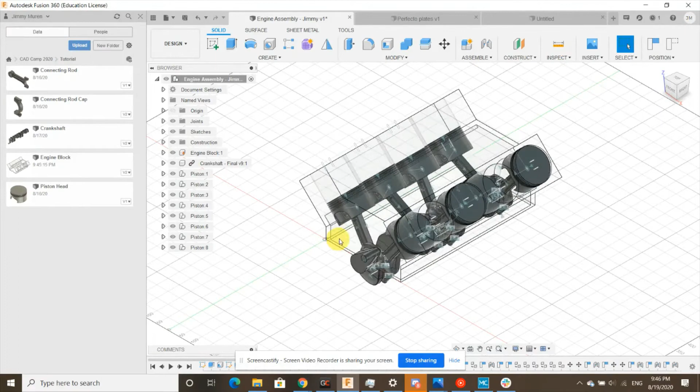Today we're going to be putting all these pieces together into an engine assembly, like you see over here. Once we put them all together, they will actually be jointed in a way that they move just like a V8 engine. Pretty cool, huh? So without further ado, let's get right into it.

The first thing we're going to want to do is open up our engine block file. This is where we're going to be creating our assembly. Double click that and open it up.

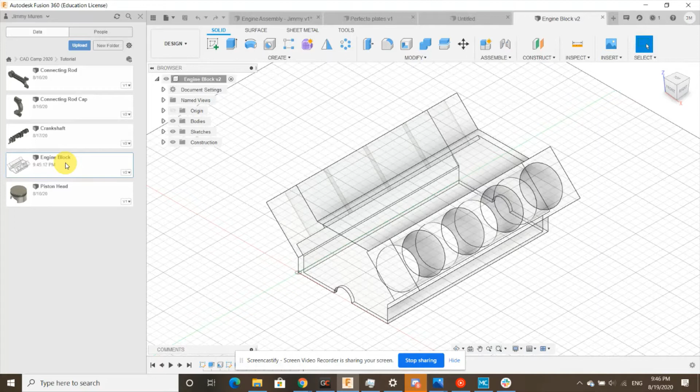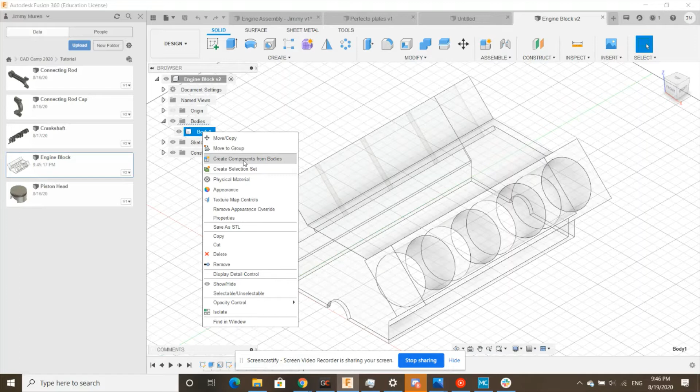Now, the first thing we're going to want to do in our engine block file is actually turn our engine body into a component. How we're going to do that is we're going to find our bodies folder in the feature tree, hit the drop down, right click the body which is linked with this engine right here, and we're going to choose create components from bodies. We hit that, and you see a new component pops up. So a component is symbolized by a cube, and these bodies, which you saw before, were symbolized by a cylinder. So now this engine is a component.

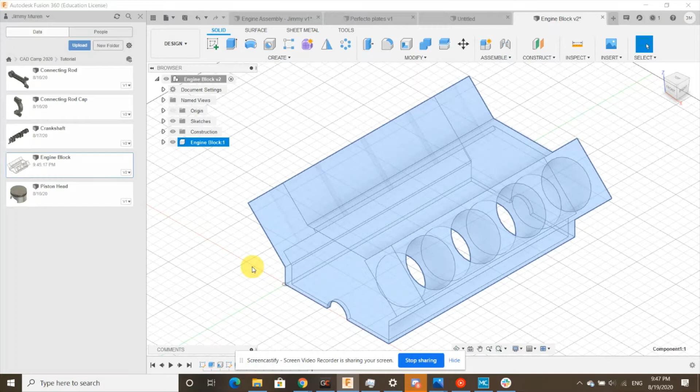You can double click that to change the name, and we're just going to call this engine block. Okay, so the first step is done.

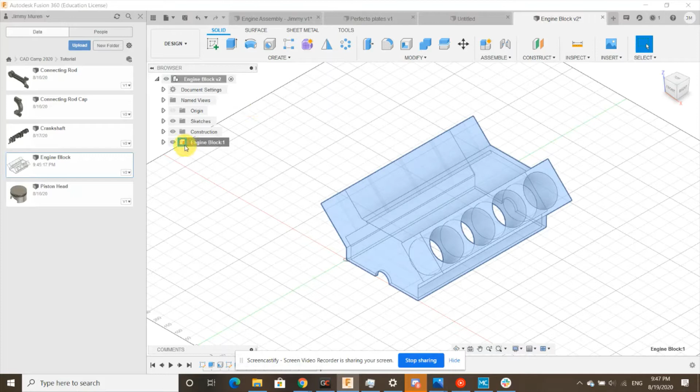Now, another thing we want to do is make sure that this engine isn't moving around while all the other parts inside are moving around, because right now we can drag it all around however much we want, which isn't good, since if the engine can move and all these other parts can move, it's just going to create a mess. So we're going to right-click engine block, and at the top choose Ground. Now you see a little pin appear next to our engine block component icon. That means it's grounded, and if we try to drag it around, you'll find that you cannot drag it around anymore, which is exactly what we want.

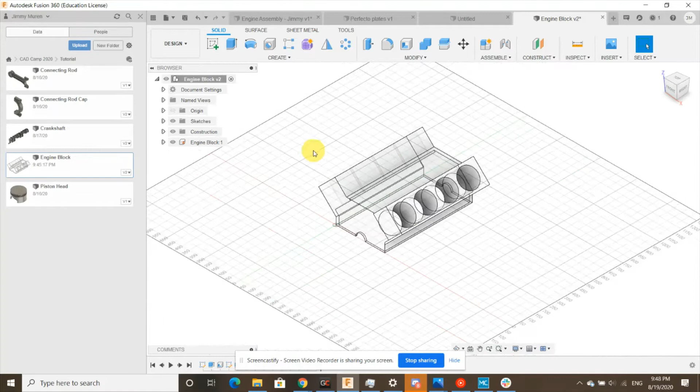Okay, so once we have our engine block as a component, now we're going to start inserting our other components into this assembly. You can see up here this icon turned into 3 blocks, which is the icon for an assembly. Once again, bodies are a cylinder, components are a block, and these 3 blocks is an assembly.

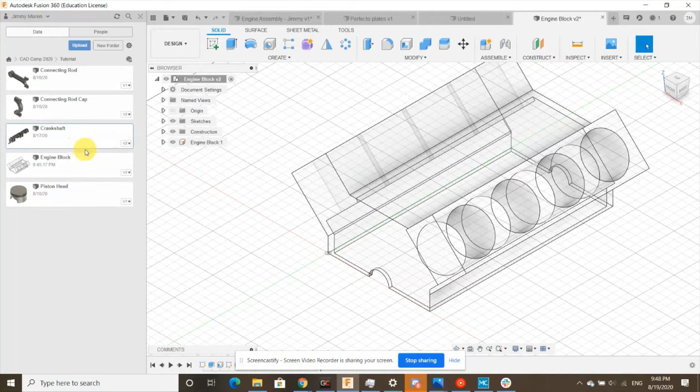So we're going to insert our crankshaft by right-clicking it and choosing Insert into Current Design. And boom, there we go. Our crankshaft is in the design as a component, which is what we want. The reason why we want this as a component is the new feature we're learning today, called joint, only works between 2 components, so we want to make sure everything in here is a component.

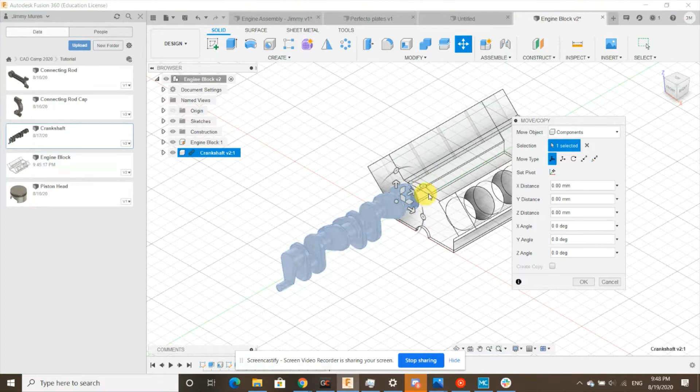Now you see there's an option to move the crankshaft around. We're not going to have to use that, because our joint feature will actually help us move it to the proper position and establish motion between the crankshaft and the engine block. So joint is really, really useful.

So now that we have our crankshaft in here, one thing we'll notice is that it has this little link. Now what does this link mean? This chain link just means that this is linked to another part in the project, which is crankshaft.

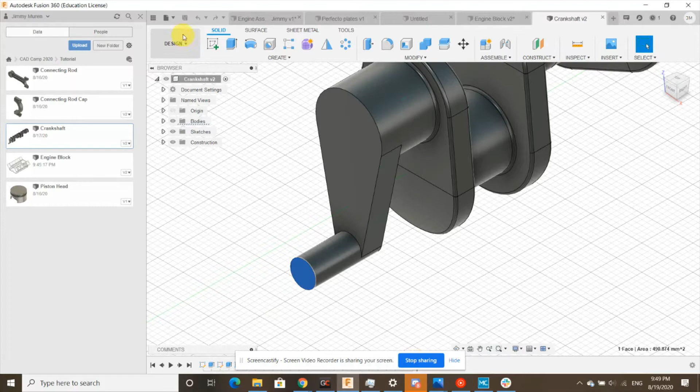So say we go open crankshaft and make a small edit, like making this handle a little bit longer. If we go to sketch, create a circle here, and extrude this maybe another 10 millimeters, we see that the handle is a little bit longer. If we save that with Control S...

We'll see that when we come back to our assembly, there's a warning sign next to that link symbol on our crankshaft. This just means that our crankshaft is now out of date because we edited it in the original file.

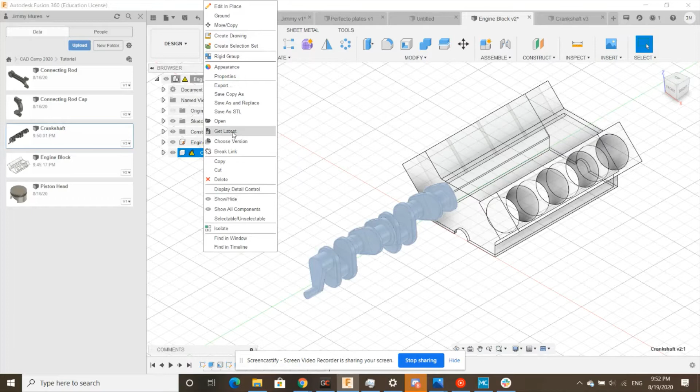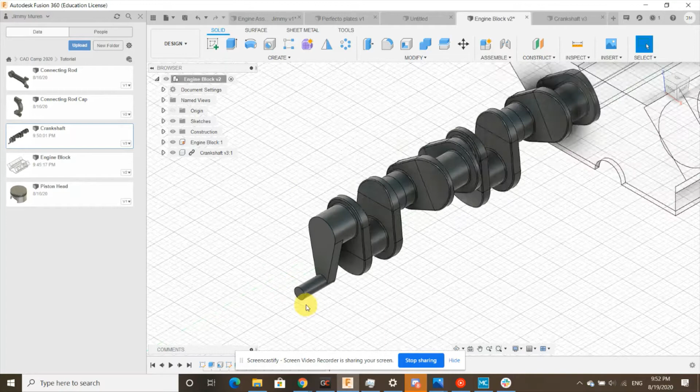If we right-click this, we'll see there is a Get Latest option. So when we hit Get Latest, see that this handle got extended out a little bit. If I undo what I just did, you'll see the shorter, older version with the error. If I redo it, it is the updated, longer version. Okay, so that's what this link means: any edits you make in the original file will update in the assembly.

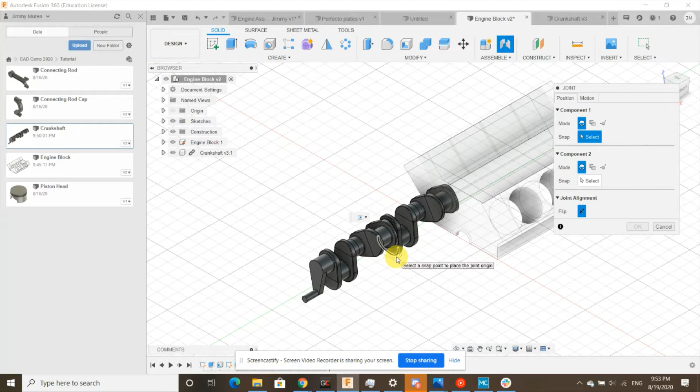Okay, so now that we have that taken care of, we're going to go ahead and start using our joints. You'll find the joint feature up in the top in your Assemble tab. Once you click joint, you're going to first click this face over here on the back of your crankshaft, and then click the very back of our engine block.

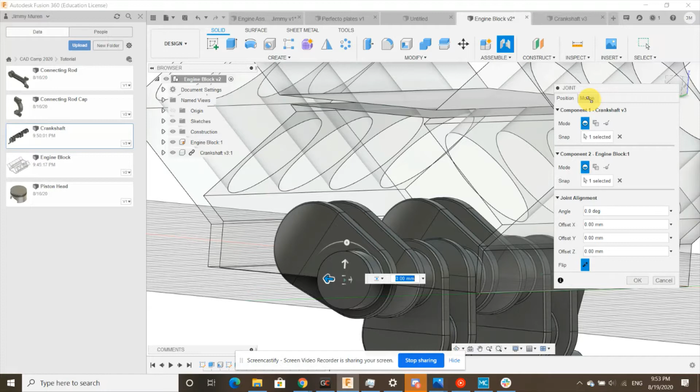When we hit that, we can see that our crankshaft got moved to the exact position that we wanted it, except it's doing a weird motion sliding in and out, which is not exactly what we want. So we're going to go to our motion tab next to position, and we can see right now it's a slider. That's why the crankshaft was sliding in and out. We want that to be revolute, which means the crankshaft is just rotating. Now you can see it does a little demo of the motion, and that's exactly what we want. So we're going to hit OK.

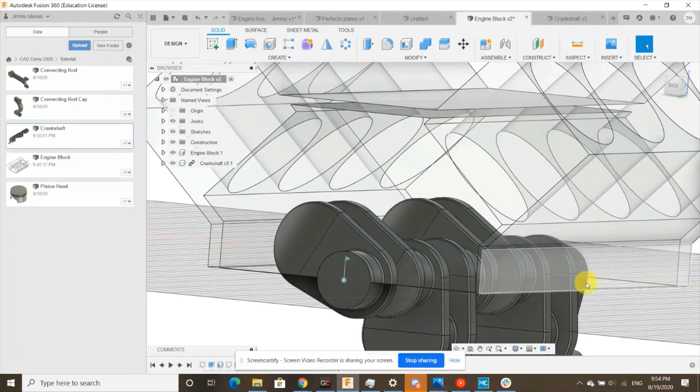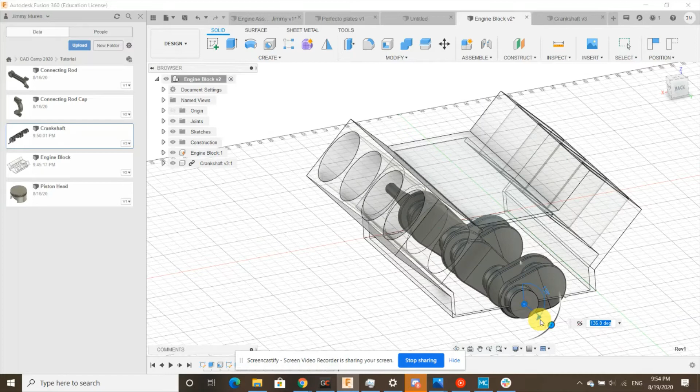Now, once we have revolute established, we can actually grab the crankshaft handle. And when we spin our mouse, we can see that the crankshaft spins as well. And there we go, our first joint is completed. Now, another way you can go about spinning this is just clicking this blue flag in the back. When you double click it, a little spinner will pop up, and you can hold this and rotate that way as well. Either way works.

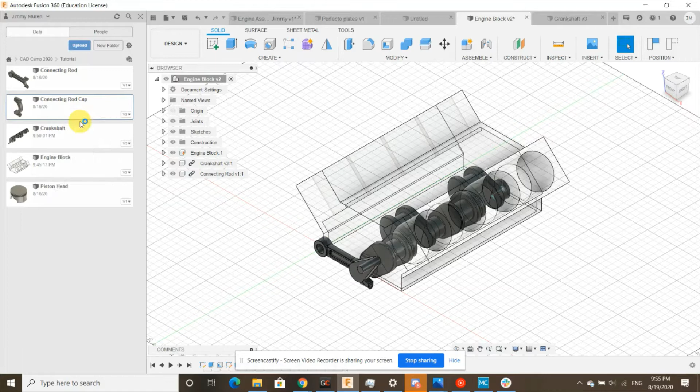So now that we have our crankshaft in, it is time to add our pistons. How we're going to do this is first, we're going to have to put our piston together, so we're going to have to insert the different components. So connecting rod first, once again right click, insert into current design, and then connecting rod cap. That connecting rod cap, right click, insert into current design. And we're just going to drag that out so that it's a little bit in front of our connecting rod, and then hit OK. Now what we're going to do is put another joint between the cap and the rod.

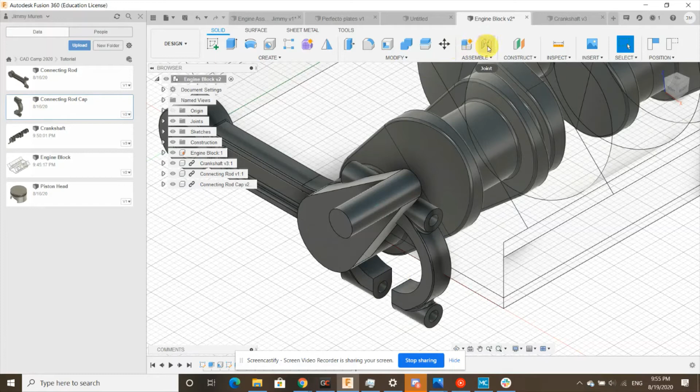We're going to hit joint, make sure we capture the position. So we're going to click this hole on the connecting rod, and then the corresponding hole right here of the connecting rod cap. You can see that joins them together. Right now it does a little preview of the connecting rod and connecting rod cap rotating, and that's because we have revolute selected. But we don't want them to rotate, we want this to stay rigid in the same place. So we're actually going to click rigid for our motion type.

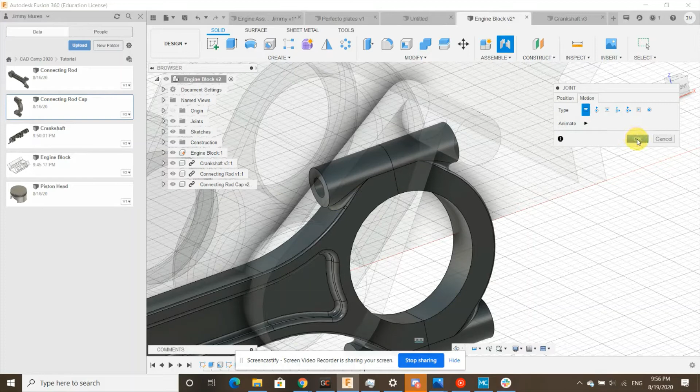Kind of gives it a little shake. That just shows that this isn't going anywhere. This is stuck together now with this joint, as I can demonstrate when I click OK. If I take it and drag it around, you can see nothing I do will take these two apart. So these two pieces are permanently put together, which is what we want.

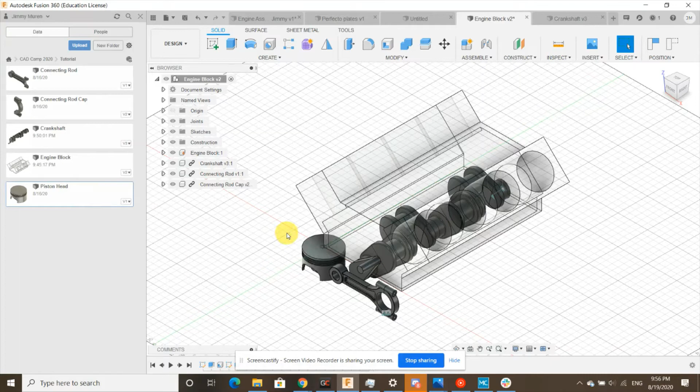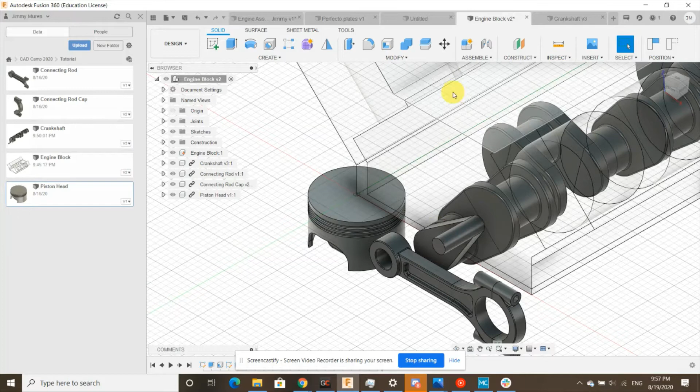Next, we're going to insert our piston head. So once again, right click, insert into current design. And we're just going to leave it right there because the piston head is actually going to connect to this side of our connecting rod right here. So all you have to do is put it somewhere near where you want to connect it. It doesn't have to be perfect because as you saw with our other joints, it moves it to the correct position automatically. So once again, we're going to hit joint, capture position. We're going to choose this hole on our connecting rod, and then choose that corresponding hole on our piston head, so right in here.

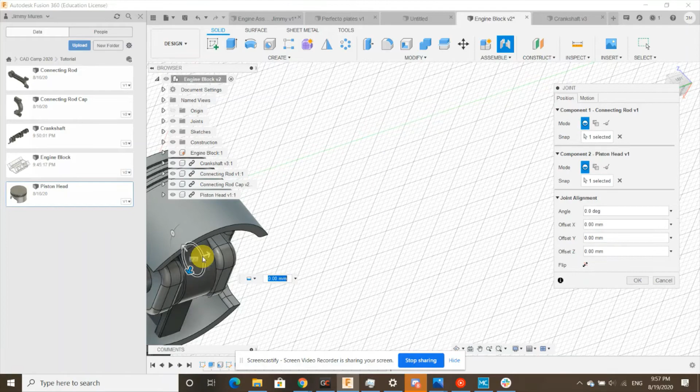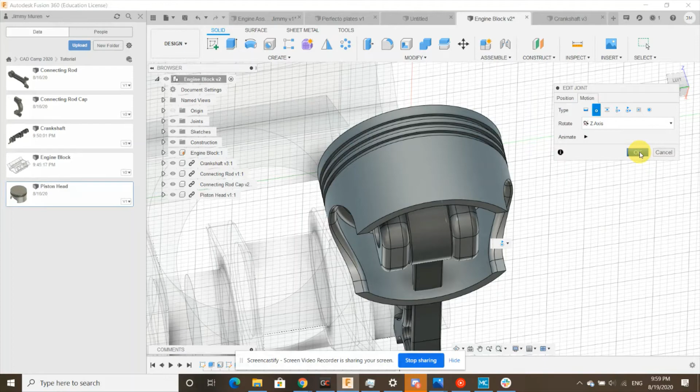You can see once we click that, right now we had our rigid motion selected. But we actually want this piston to be able to rotate, so we're going to go into our motion and select revolute. Once we select that, it gives us a little preview that the piston head and the connecting rod now rotate with each other. And then we're just going to hit OK. Going back to our home view, you can see all these pieces are connected together now as a piston.

But if you remember from our engine assembly, we're going to need 8 of these, right? It's going to be a lot of copying and pasting, and a lot of work if we have to do this 8 more times. So what we're going to do is we're actually going to save all 3 of these and their joints into one new component called piston.

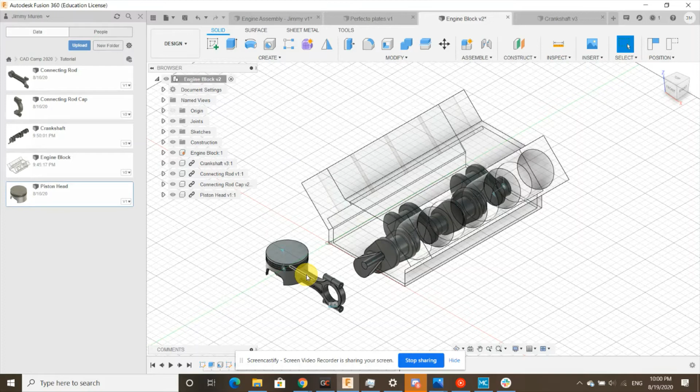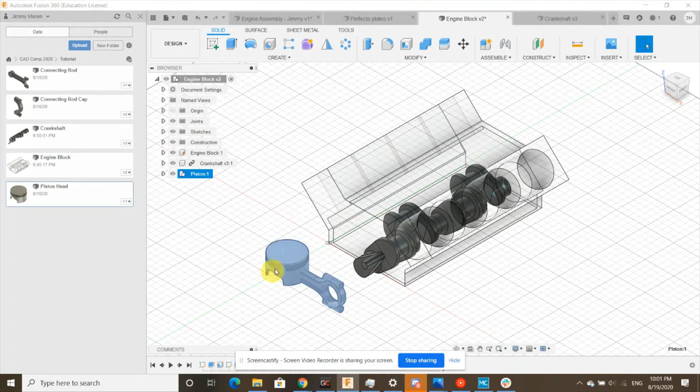How we do that is we're going to go next to our joint and select new component. And make sure activate is unchecked, I believe it's checked by default. And we're just going to name this component piston and hit OK. Now you can see piston got created in our feature tree over here. And all we're going to do is drag each part, capture position, drag each part of our piston into our piston assembly. And you can see it's an assembly by those 3 blocks there. And once we select our piston assembly, you can see that it highlights every single part on there, which is exactly what we want.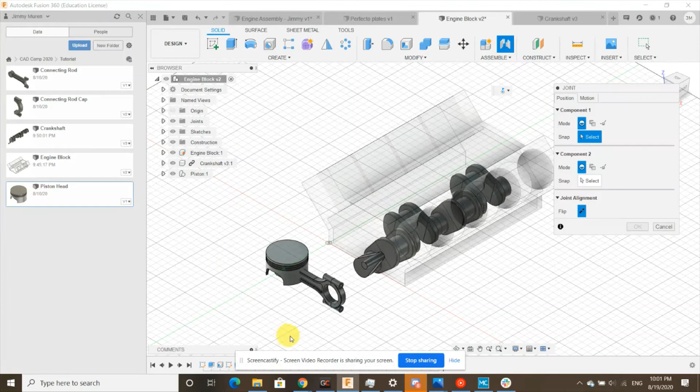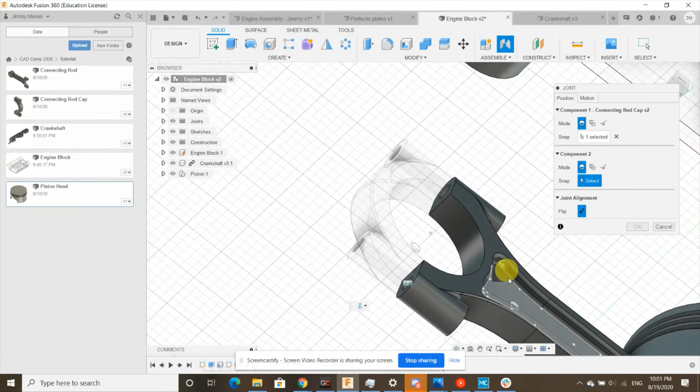Okay, so now that we have our piston assembly taken care of, we can start putting these pistons onto our engine. And as you may have guessed, this is going to be using a bunch of other joints. The first joint we're going to use, click joint, and we're going to click either side, either semicircle on the connecting rod or the connecting rod cap. I'm just going to click that semicircle, and then we're going to hit a corresponding piece on our crankshaft. It'll be this right here.

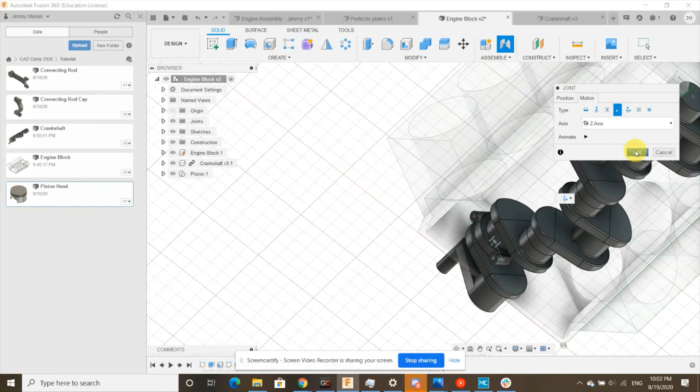Okay, once that snaps there, we want to make sure our motion type is not revolute anymore, but cylindrical.

At first you'll see that only half of our piston moved, but after you click OK, the rest of the piston comes with it. That is the first of our constraints.

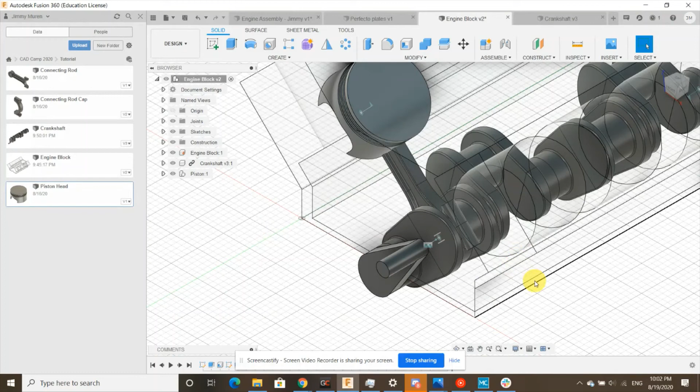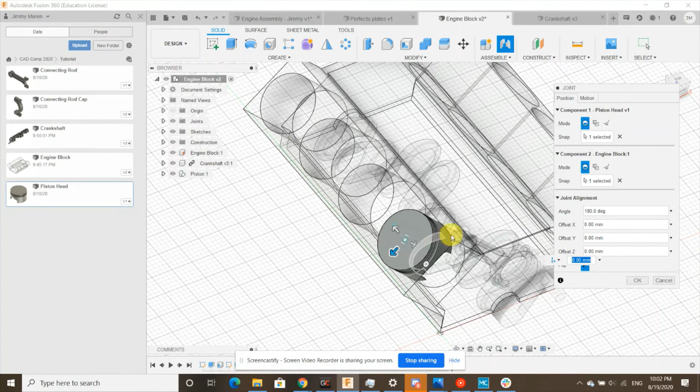Next, another joint: we're going to select the top of our piston head, then select this first hole right here. The type of motion right now is cylindrical selected, but we don't want it spinning around, we just want it sliding up and down.

So the type of motion we're going to choose is slider. You can see in the preview, the piston is just sliding up and down, which is what we want. We're going to hit OK.

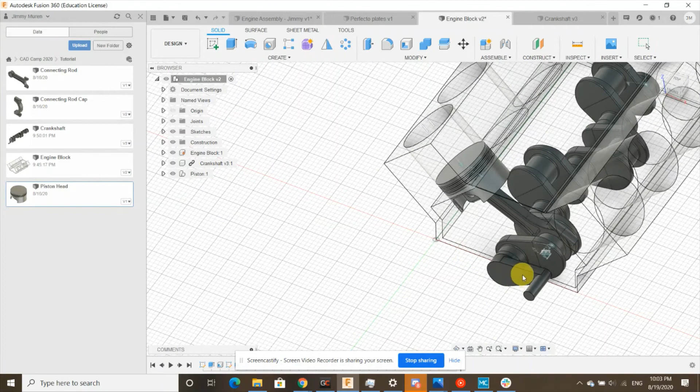Once we have those two joints set, we can test a little preview of this. As we turn the crankshaft, you can see this working well. The connecting rod has a cylindrical joint to the crankshaft, and the piston is sliding in and out of that hole. There we go, one out of eight done.

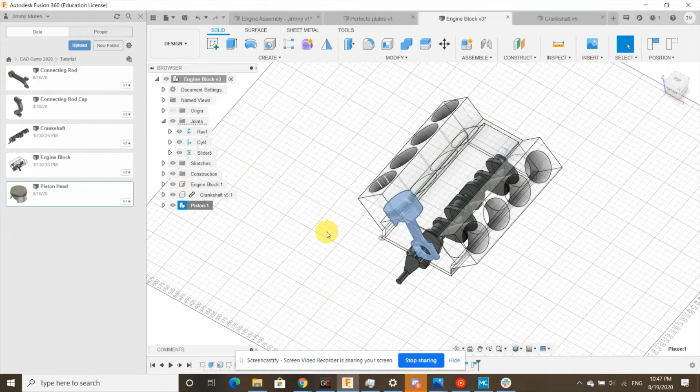For the next seven joints, it's just the exact same procedure. We're going to be copying and pasting seven more pistons, then attaching them the same way. Right-click our piston, hit copy, then right-click anywhere and hit paste. Make sure you hit continue instead of capture position.

Then we'll just drag this piston out, and we can see we have an exact copy of that piston. We're going to hit OK. Next, we're going to choose joint.

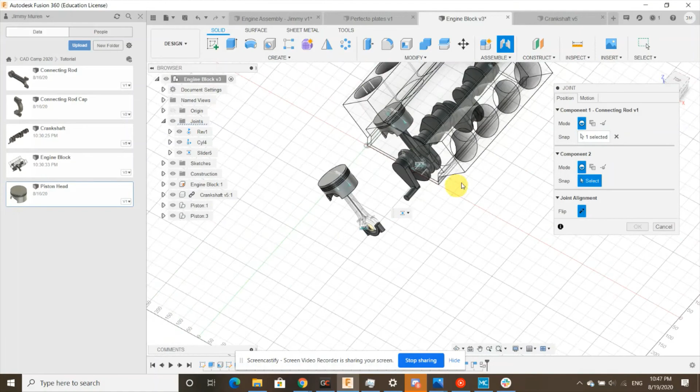This time I'll choose the upper semicircle, just to show that both can work. We're going to go down here and click our crankshaft, and make sure that motion was cylindrical. Hit OK. Next, we're going to select the face and this hole.

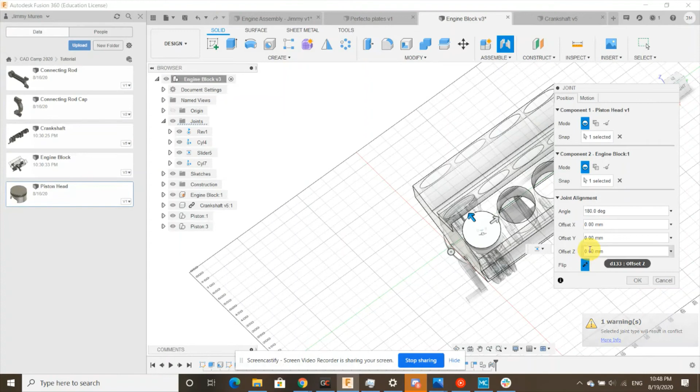There we go, we have it in the hole, and make sure that is a sliding motion. Sometimes Fusion 360 might insert the piston head upside down, and all you have to do is use the flip option down here, and you can flip it back to the correct position. Once we have that done, we're going to hit OK.

And now, voila, we have two pistons in our V8 engine. So we're just going to do that six more times, and after you have that done, you should have a completed V8 engine.

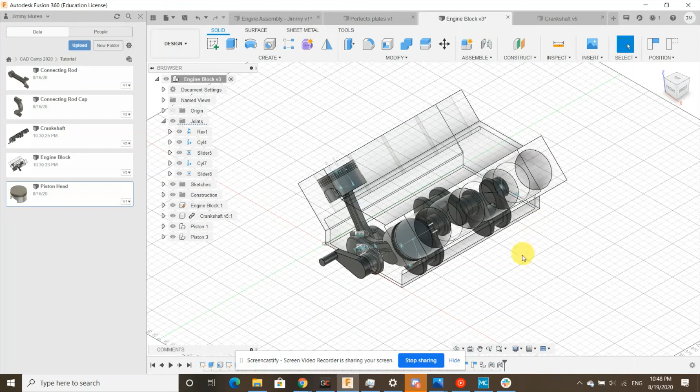I hope you were able to finish all eight pistons onto your crankshaft, jointing them together. When you're done, it should look something like this. When you rotate the crankshaft handle, all eight pistons chug along, just like a fully functioning V8 engine. Some pretty cool stuff there.

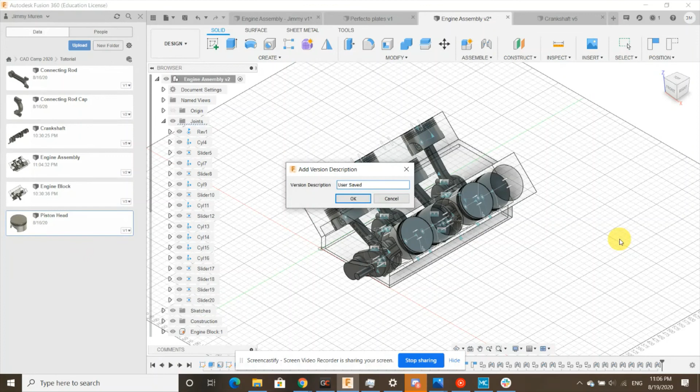At this point you are completely finished CADing and jointing together this V8 engine assembly. Congratulations. We can go ahead and hit Control S to save, and it should pop up on the left side here with all the rest of your parts.

Once again, at this point you're completely finished with CADing it, but going forward you can do some experimenting with the different tools we've learned throughout this course. One thing you can do is go to Modify and Appearance, or just use the keyboard shortcut A.

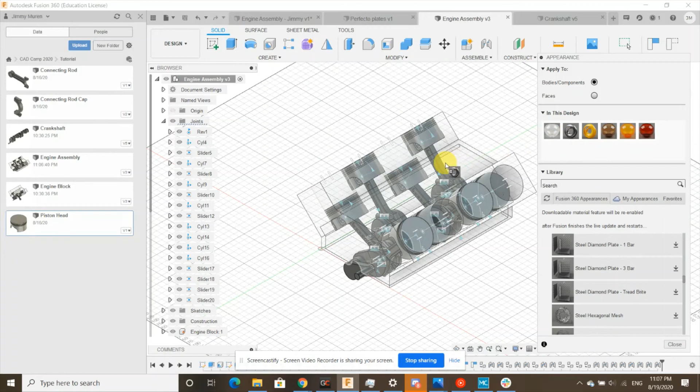You can change the material of your engine. If you want it to be a bit more metallic or realistic, you can drag metal onto it. I personally prefer polycarbonate because you can see everything going on inside, and there are many, many materials you can search up in Fusion 360's library. That's one thing you can do there.

Another thing we've learned is the fillet, so we can fillet out the corners. If you think this engine block doesn't look good enough to your standards, you can go fillet around and kind of refine the edges. At this point, all you're going to do is just look through the toolbar, experiment with features, and after all, that's really how you learn a lot in CAD, just by playing around with them.

So just as a quick recap, in this lesson we mainly focused on joints and components. We turned our bodies into components so we could use joints on them. The joint types we learned were revolute, which we used on the crankshaft to make it spin, cylindrical, which we used on our connecting rods to make them slide and spin, and finally slider, which let our piston head slide in and out of the V8 engine holes.

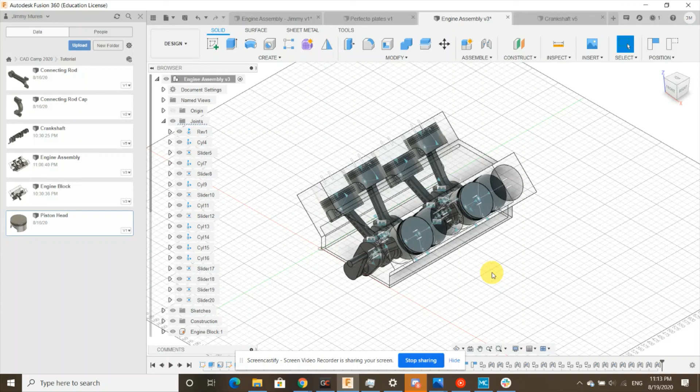I hope you enjoyed working with that V8 engine assembly. It's definitely a really fun assembly to play around with. Using the skills you've learned in this course, I hope you're able to do great things in Fusion 360 in the future. I will see you in our final lesson. Thanks for watching.